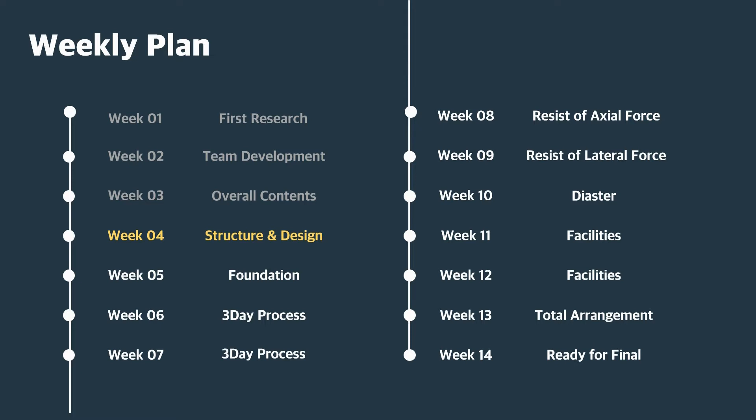In the last week, we had shown our overall content, and today we will present about structure and design of Burj Khalifa and preview of next week. In the last week, we had to talk about condition, goals, and solutions of Dubai. They had depended on oil industry, so popularity and tourism industry are goals of Dubai, and high-rise building is solution for Dubai's condition. And you can see the design plan in following pages.

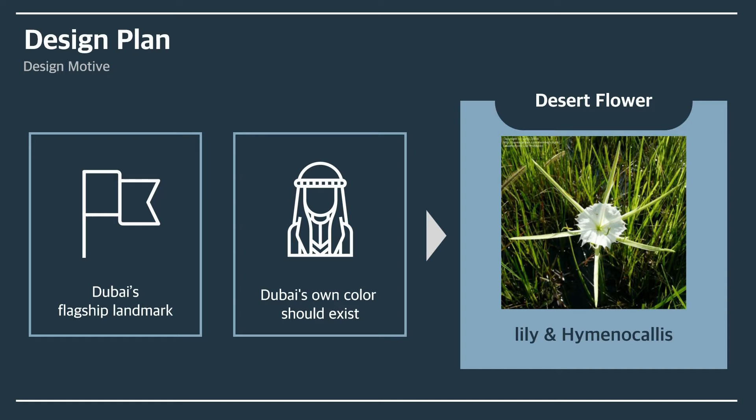They had to build their flagship landmark, and Dubai's own color should exist in building to achieve their goals. At first, they were inspired by the flower that usually blooms in desert, because Dubai was surrounded by desert. It also used the traditional Islamic architecture, because local characteristics should be emphasized. There are typical Islamic architecture, there is spiral-shaped minarets and an onion dome. So it was made into a modern Burj Khalifa design by receiving images of them.

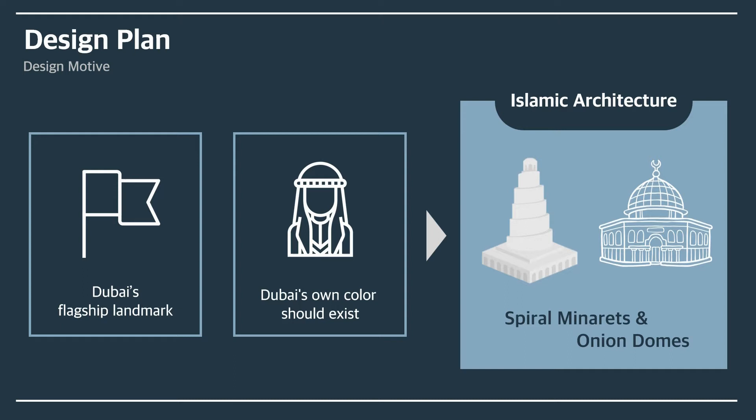Because of this inspiration, the early design was changed to nowadays design in 2003. Over time, design and height were changed during construction. And last, the final design was decided in 2007. As a result, the final design was fixed, and this building had a huge impact on Dubai's identity, like it was first inspired. Also, the architect of Burj Khalifa, Adrian Smith, said that a tall tower would not only give the master plan an identity, but also become the identity for Emaar and the country of Dubai.

In the process of building skyscrapers, supertall buildings are not practical or efficient if they are scaled-up versions of smaller buildings. So, what is the problem that arises when the height of building is very high? We approached the Burj Khalifa thinking about what method has been employed to solve these problems.

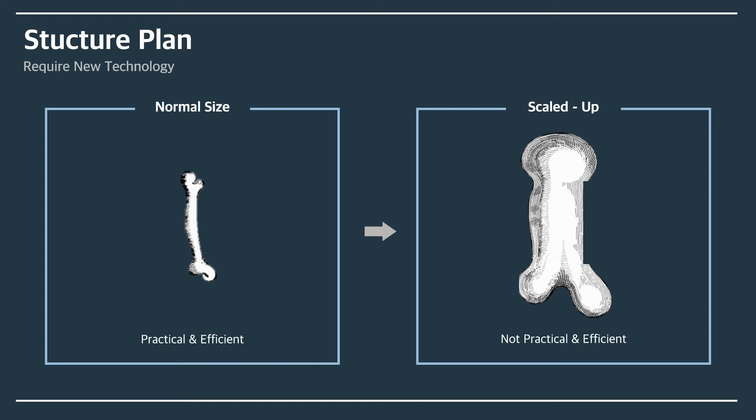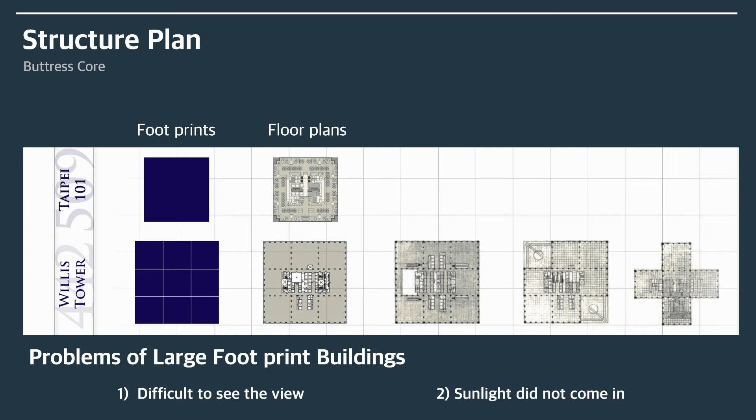This slide shows general high-rise building floor plan. As you can see these pictures, the general skyscraper had a large footprint to make them tall. But it had general problems. First, it was difficult to see the view from interior space. And second, the sunlight did not come in. In order to solve these problems, Y shape was employed in aspect of design, which is advantageous in view rights even in the interior space.

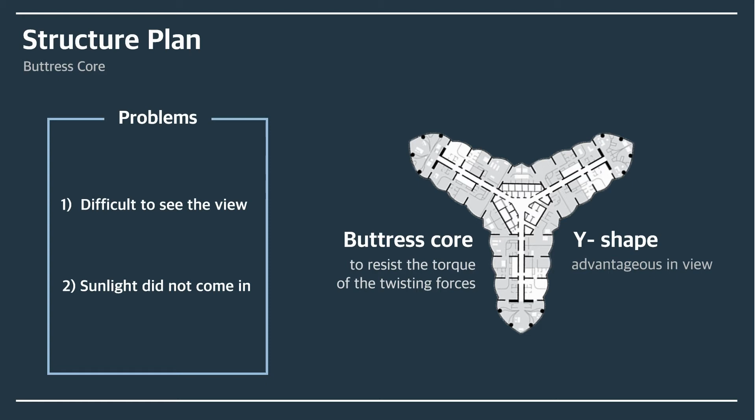It has also employed a new structural system called buttress core, which can solve problems such as building twisting that may occur using Y-shaped design. The core is the center hexagon in the middle of the building, and it was used to resist the torque of twisting force on the building. Next slide shows the information about Y-shape and buttress core details.

At first, Y-shape plan. The Y-shape plan is ideal for residential and hotel usage, with the wings allowing maximum outward views and inward natural light. Therefore, it was right for the structure of Burj Khalifa, which has many hotels and residential spaces.

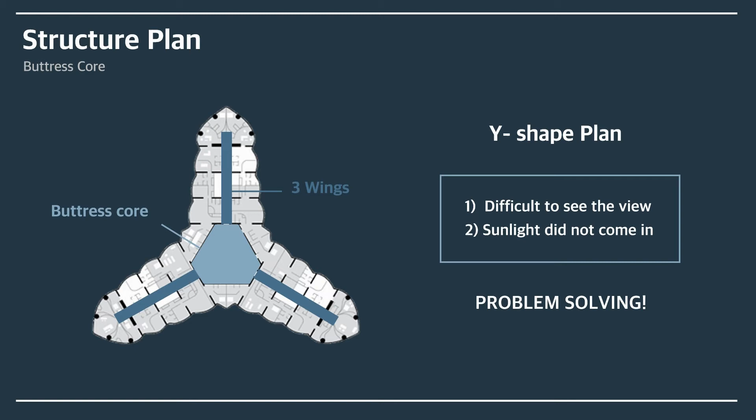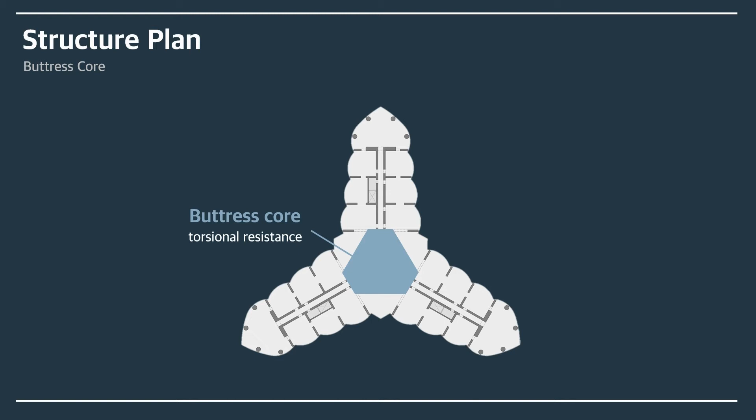Second, buttress core structure. The main structural system for this megastructure has been named a buttress core. This new structural system allows for a dramatic increase in height. Buttress core consists of a three-winged structure anchored to a strong hexagonal center core. Each wing is buttressed to each other to provide a highly stable system.

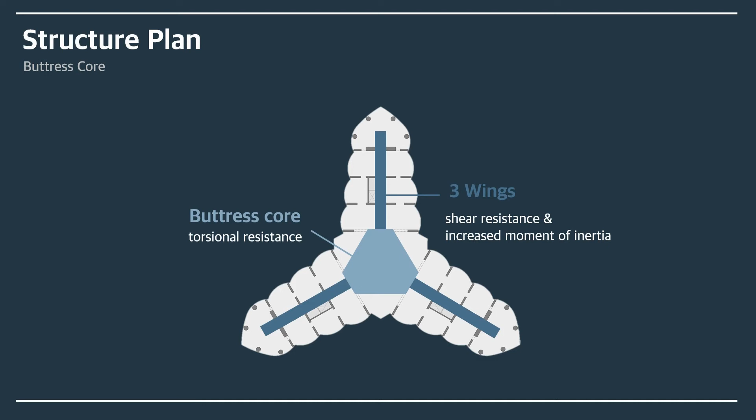The center core provides the torsional resistance for the building, while the wings provide the shear resistance and increased moment of inertia. It is composed of high-performance concrete wall structures, making it more stable. With the addition of flat plate floor construction and perimeter columns, the entire structural system of Burj Khalifa acts like a single unit, creating a tower that acts as one giant concrete beam cantilevering from the ground.

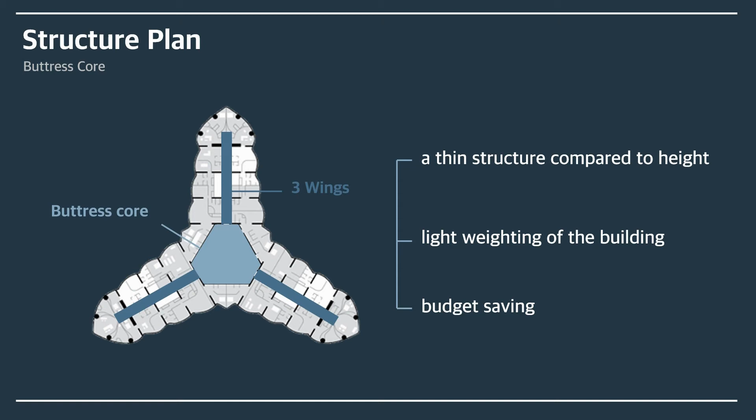By introducing the buttressed core, Burj Khalifa was able to obtain a thin structure in spite of its height, which resulted in lightweighting of the building and budget saving. The buttressed core also solved wind loads and structural challenges, but we will tell you more engineering details in the physical part. As you can see in previous slides, to make a thin and tall building there are many efforts, and choosing materials is also important.

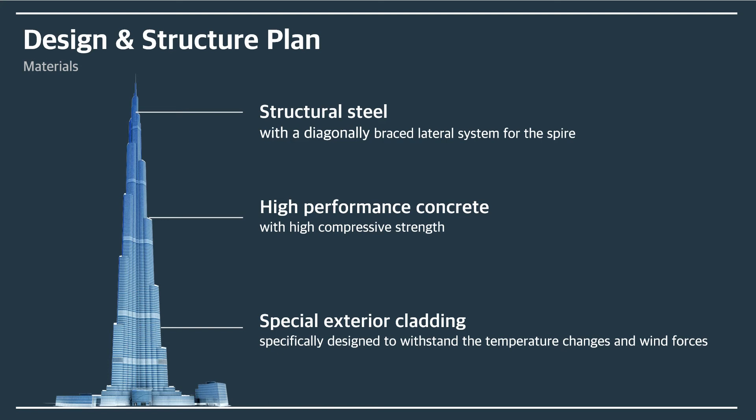In this slide, we will give brief information about the materials used in each section. First, special exterior cladding, specifically designed to withstand temperature changes and wind force. Second, high performance concrete with high compressive strength to make Burj Khalifa tall. Third, in the spire section, structural steel with a diagonally braced lateral system. By choosing these materials, Burj Khalifa could be built.

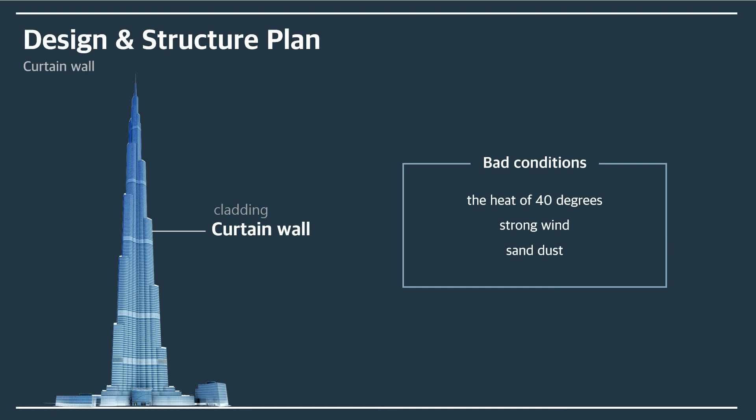Now, let's see the exterior of the building. If you look at the cladding of the building, you can find out the curtain wall method was used. Because Burj Khalifa was located in the desert, it was in bad conditions. For example, a temperature of 40 degrees, strong wind, and problems caused by sand and dust. Nevertheless, glass panels were used as finishing materials. So it was important to control the temperature inside the glass Burj Khalifa.

Materials used for the region are as follows. This glass panel is double and has an air layer in the middle. Also, the inner glass is coated with silver to block infrared rays reflected from sand, and a thin layer of metal is created on the outer glass to block ultraviolet rays. Therefore, the glass used in the curtain walls transmits only 20% of the light.

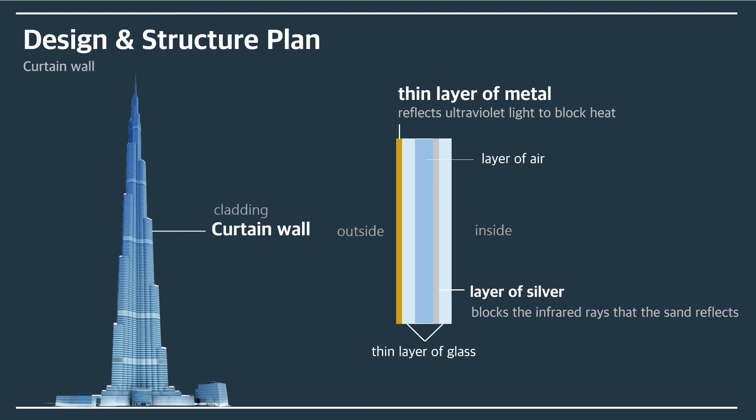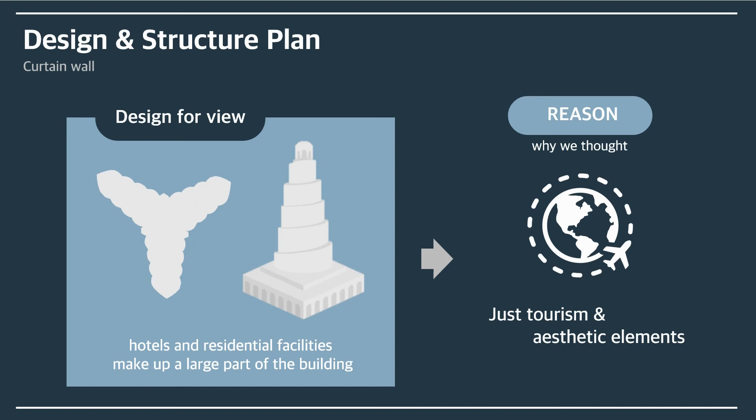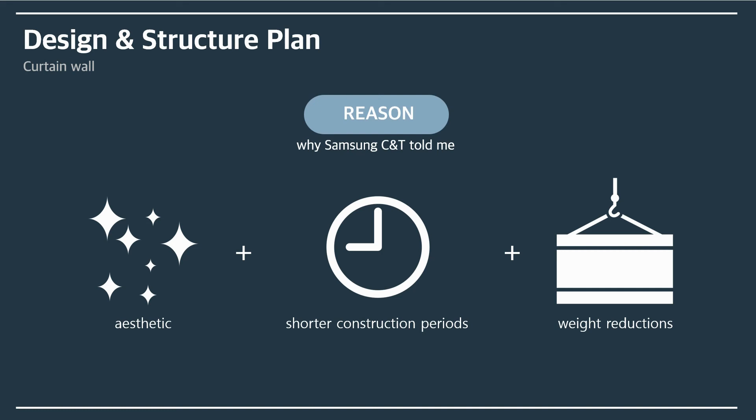As we mentioned in previous slides, hotels and residential facilities make up a large part of this building, because the Y shape or spiral design was designed for viewing the scenery of the coast. So we approached the reason for installing curtain walls using glass panels in Burj Khalifa thinking it's just tourism and aesthetic elements. However, after inquiring with Samsung C&T, not only aesthetic factors, but also shorter construction period, budget cuts, and weight reductions were considered. And Burj Khalifa is composed of a spire at the top.

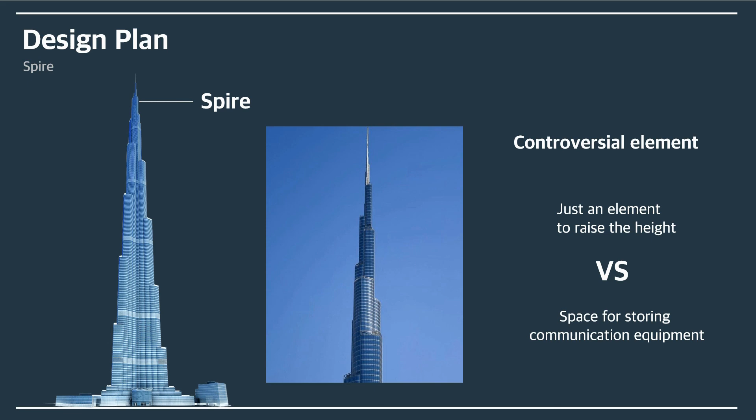Though the Burj Khalifa spire is one of the most defining features and has a practical use, housing the building's communication equipment, in architecture circles it's somehow controversial, as are spires in general. In 2013, the Chicago-based Council on Tall Buildings and Urban Habitat issued a report on what they deemed vanity spires, claiming that these uninhabited spaces are simply used to make a building stand that much taller.

From next week, we will research the construction part. We think Burj Khalifa has a lot of information, because it is high and a lot of construction methods have been used. For example, the soil is too weak, so the foundation is very important. And there are many situations affected by the natural environment of the desert, methods of calculating errors that are more important because they are high buildings, and methods of preventing loss caused by wind and earthquakes. We will talk about how to solve these various issues, starting from the foundation.